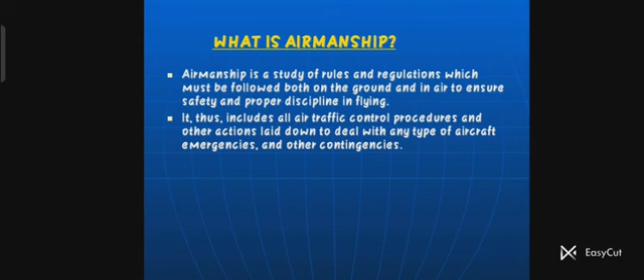Why is airmanship important for aviators? Airmanship helps to inculcate the sense of discipline amongst pilots and other crew members. It helps the pilot to know the standard procedures. It helps the pilot to know the procedure to be followed in emergency situations. Finally, airmanship, when studied in the correct sense, promotes flight safety and prevents aircraft accidents.

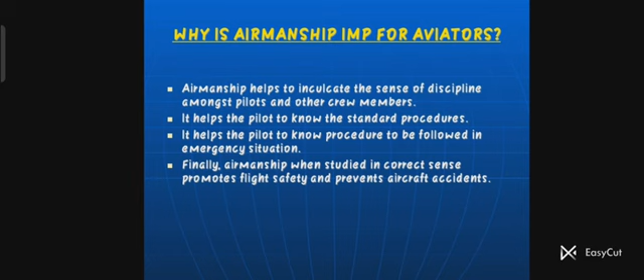So, some of the terms in airmanship are: aerodrome, a defined area on land or water, including any buildings, installations, and equipment intended to be used either wholly or in part for the arrival, departure, and movement of aircraft. So in this picture below, it is a whole aerodrome. We can see that.

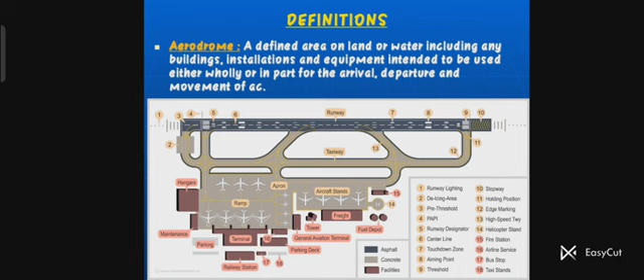Airfield. The airfield refers to an area of land used for takeoff and landing of aircraft and excludes buildings and installations. Airport. The word airport is mainly used for civil flying establishments which handle international air traffic and therefore have a custom house and other travel amenities.

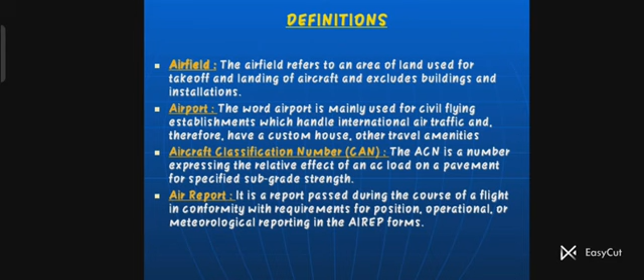Aircraft classification number. The ACN is a number expressing the relative effect of an aircraft load on a pavement for specified subgrade strength. Air report. It is a report passed during the course of flight in conformity with the requirements for position, operation, or meteorological reporting in the AIREP forms.

Aerodrome reference point. It is the designated geographical location of an aerodrome, normally taken as the geometrical center of the runways, or runway in the case of a single runway aerodrome. The ARP is defined in degrees, minutes, and seconds of latitude and longitude.

Aerodrome traffic zone. The airspace extending from an aerodrome to a height of 2000 feet above the level of the aerodrome and within the distance of 1.5 nautical miles of its boundaries, except any part of that airspace which is within the aerodrome traffic zone of another aerodrome which is notified as being the controlling aerodrome, is called the aerodrome traffic zone.

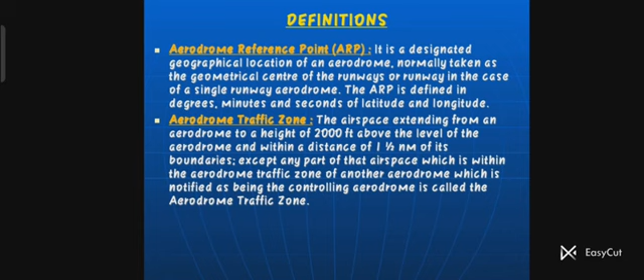Air Defense Identification Zone. Airspace of defined dimensions within which the ready identification, location, and air control of aircraft is required. No flight of aircraft, civil or military, Indian or foreign, originating within the ADIZ defined under Para 1 above and those penetrating into these ADIZ are permitted without air defense clearance, except the local flights conducted within the airspace of 5 nautical miles radius centered at ARP and vertical limits of 1000 feet AGL of an aerodrome. Aircraft when operating to, through or within the ADIZ shall obtain air defense clearance before takeoff through the ATC concerned.

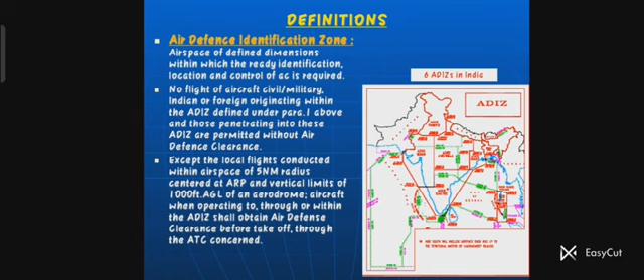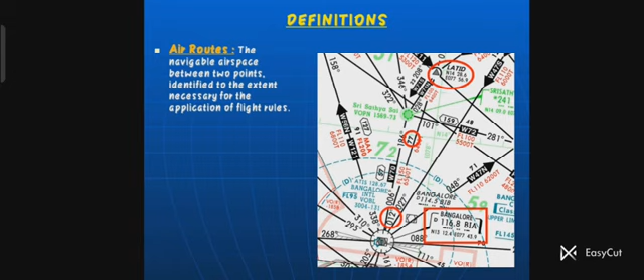Air routes. The navigable airspace between 2 points identified to the extent necessary for the application of flight rules. Here we can see the air routes around Bangalore. Air Traffic Advisory Service. Service provided to ensure separation insofar as possible between aircraft which are operating on an IFR flight plan outside control areas but within advisory routes or advisory areas.

Air Traffic Control Center, an organization established to provide air traffic control within the control area, flight information service within the flight information region, and alerting service for search and rescue within its flight information region. Air Traffic Control Clearance. It gives authorization for an aircraft to proceed under conditions specified by an air traffic control unit.

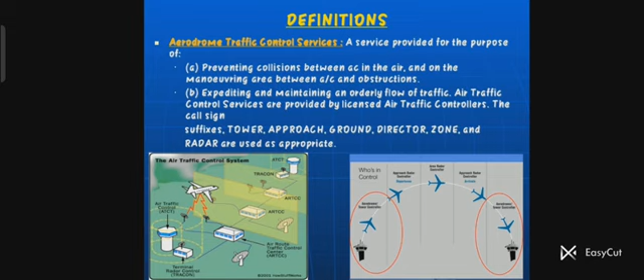Aerodrome Traffic Control Service, a service provided for the purpose of preventing collisions between aircraft in air and on the maneuvering area, between aircraft and obstructions, and expediting and maintaining an orderly flow of traffic. Air traffic control services are provided by licensed air traffic controllers. The call sign suffixes tower, approach, ground, director, zone, and radar are used as appropriate.

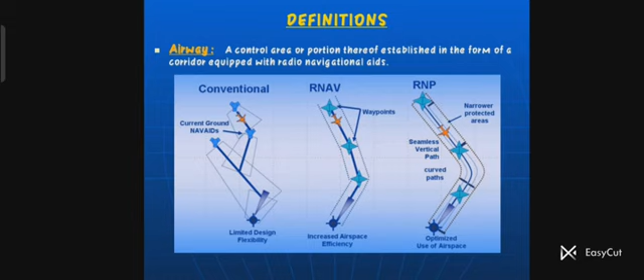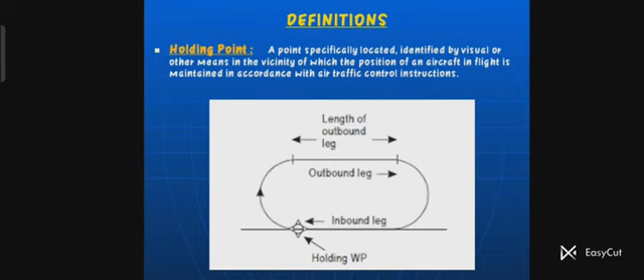Airway, a control area or portion thereof established in the form of a corridor equipped with radio navigation aids. Holding point, a point specifically located, identified by visual or other means, in the vicinity of which the position of an aircraft in flight is maintained in accordance with air traffic control instructions. Heading. Heading is the direction in which the longitudinal axis of the aircraft is pointed, usually expressed in degrees from north.

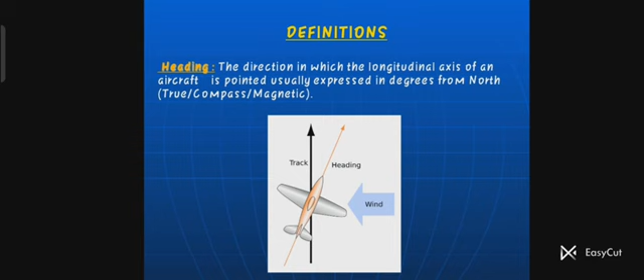Height, the vertical distance of a level, a point, or an object considered as a point, measured from a specific datum. Altitude, the vertical distance of a level, a point, or an object considered as a point, measured from mean sea level. Elevation, the vertical position of a point or a level on or affixed to the surface of the earth measured from mean sea level. Flight level, it is a surface of constant atmospheric pressure which is related to a specific pressure datum of 1013.2 MB and is separated from other such surfaces by specific pressure intervals.

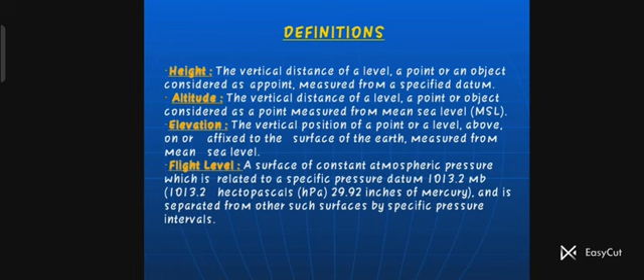Prohibited area: airspace of defined dimensions above the land areas or territorial waters of a state within which the flight of aircraft is prohibited. Danger area: an airspace of defined dimensions within which activities dangerous to the flight or ground maneuvering of aircraft may exist at specified times.

Restricted area: an airspace of defined dimensions above the land areas or territorial waters of the state within which the flight of aircraft is restricted in accordance with specified conditions. Load classification number: the bearing strength of a pavement or runway is defined by a number. This is associated with an indication of the characteristics and type of construction of the pavement.

Alerting service: a service provided to notify appropriate organizations regarding aircraft in need of search and rescue aid and assist such organizations as required. Alternate aerodrome: an aerodrome specified in the flight plan to which a flight may proceed when it becomes inadvisable to land at the aerodrome of intended landing.

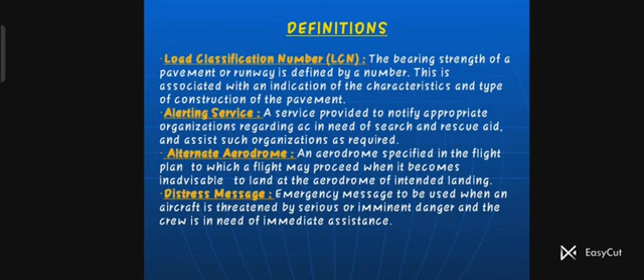Distress message: emergency message to be used when an aircraft is threatened by serious or imminent danger and the crew is in need of immediate assistance. Ceiling: the height above the ground or water of the base of the lowest layer of cloud below 6,000 meters covering more than half the sky.

Estimated time of arrival. For IFR flights, the time at which it is estimated that an aircraft will arrive over a designated point defined by reference to navigation aids from which it is intended that an instrument approach procedure will be commenced, or if no navigation aid is associated with the aerodrome, the time at which the aircraft will arrive overhead. For VFR flights, it is the time at which it is estimated that the aircraft will arrive over the aerodrome.

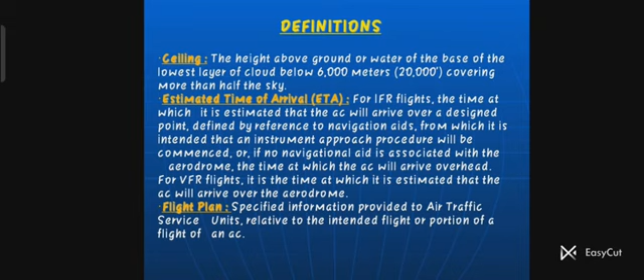Flight plan: specified information provided to air traffic service units relative to the intended flight or portion of a flight of an aircraft. Visibility. So what is visibility? It is a degree of transparency of the atmosphere, or we can say it is the measure of maximum distance to which a person with normal vision can see an object and recognize it.

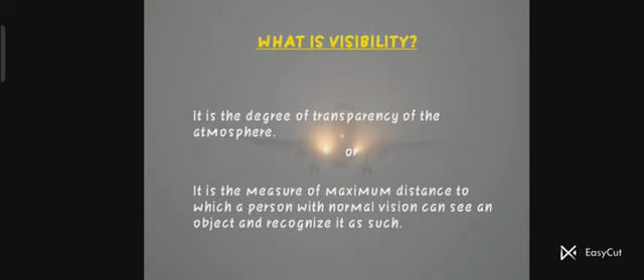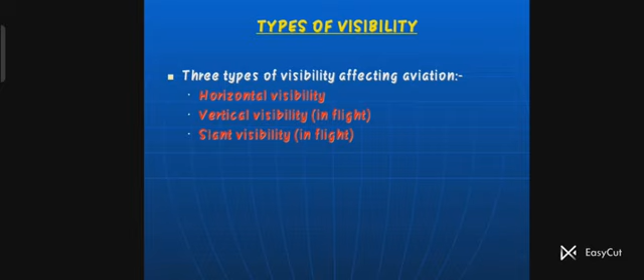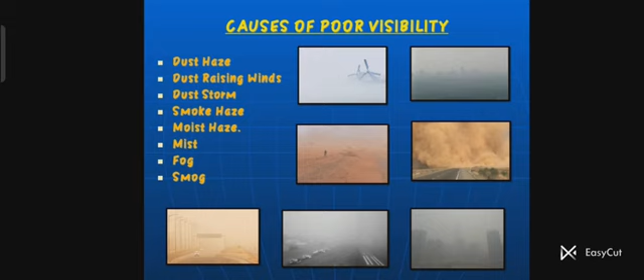Types of visibility. There are three types of visibility affecting aviation: horizontal visibility, vertical visibility, and slant visibility. Causes of poor visibility: dust haze, dust raising winds, dust storm, smoke haze, moist haze, mist, fog, smog. These are all causes of poor visibility. So here are some of the images of the causes of poor visibility.

Shoulders are the areas immediately adjacent to the edges of the runway, taxiways, overruns, and SGAs, prepared for accidental or emergency use in the event of an aircraft running off the paved surface. Cleared zones are those areas of the flight strip adjacent to the shoulders which, for safety of aircraft operations, should be leveled and free of obstructions as far as possible.

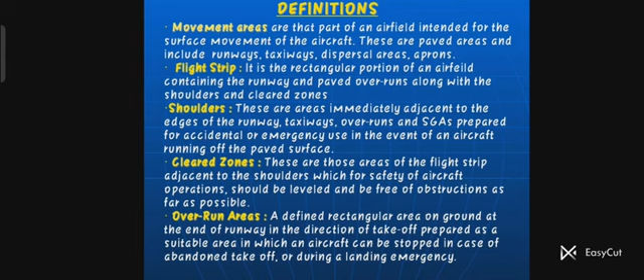Overrun areas: a defined rectangular area on ground at the end of the runway in the direction of takeoff, prepared as a suitable area in which an aircraft can be stopped in case of abandoned takeoff or during a landing emergency. Aerodrome markings consist of signs on the surface of movement areas to convey aeronautical information. Aerodrome ground markings shall consist of runway markings, taxiway markings, and unserviceability markings.

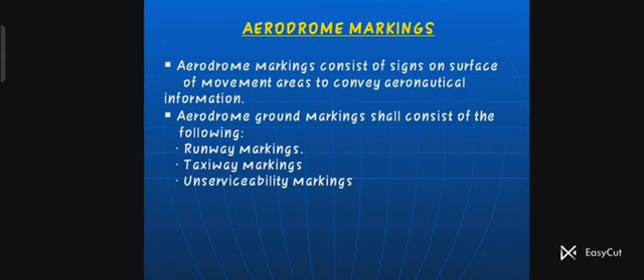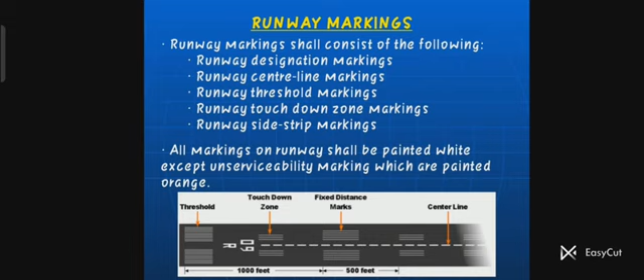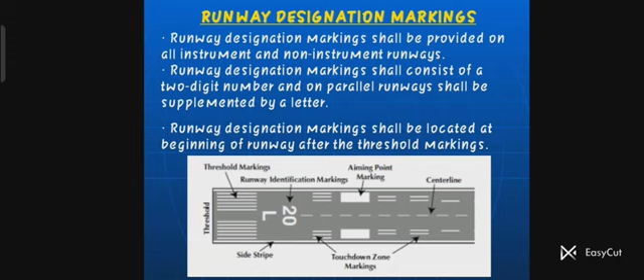Runway threshold markings shall be provided on all paved instrument and non-instrument runways. So the location of the runway threshold markings: the longitudinal stripes of the threshold markings shall commence 6 meters from the runway threshold.

Characteristics. The markings shall consist of a series of longitudinal strips of uniform dimensions symmetrically placed on both the sides of the runway center line and extending laterally to 1.5 meter from the edge of the runway. The spacing between the stripes shall be equal to the width of the stripes except that a double spacing shall be provided between the stripes nearest to the center line.

The dimension of stripes will be 30 meter long and 2.1 meter wide. The number of strips shall be 10. So these are the runway threshold markings.

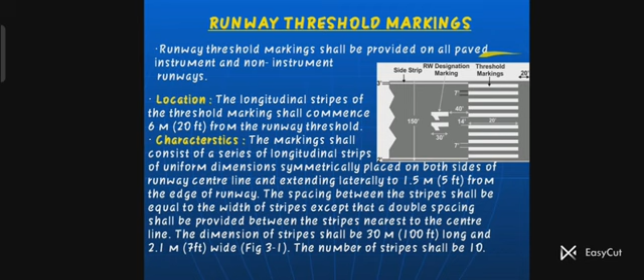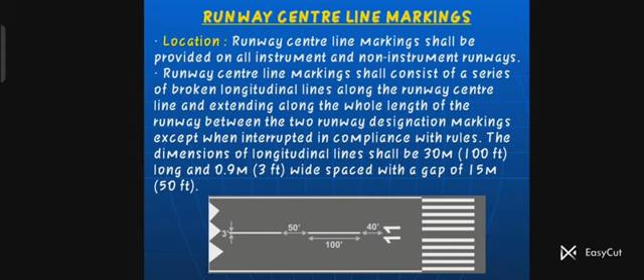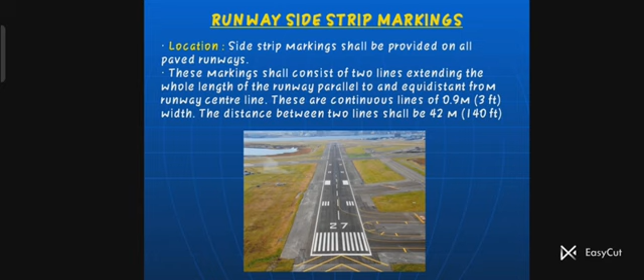Runway side strip markings. Location. Side strip markings shall be provided on all paved runways. These markings shall consist of two lines extending the whole length of the runway parallel to and equidistant from the runway center line. These are all continuous lines of 0.9 m width. The distance between two lines shall be 42 m.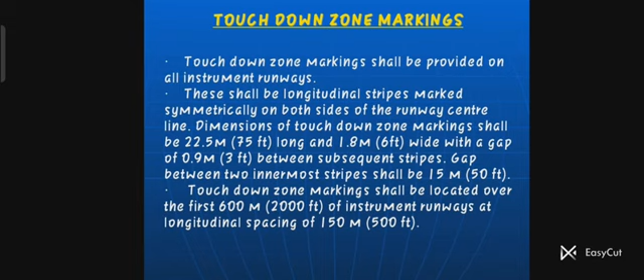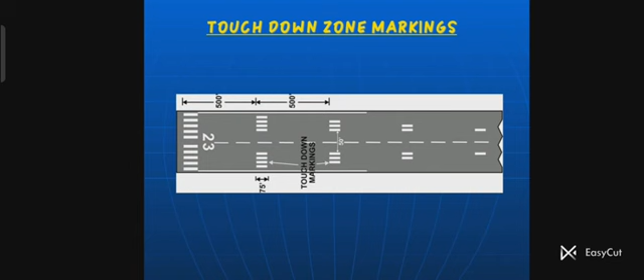Taxiway markings. Taxiway markings shall consist of the following: taxiway centerline markings, runway holding position markings. Taxiway centerline marking. These markings shall be single unbroken lines of 0.15 m wide along the center line of taxiway. These markings shall be painted white or yellow. This line shall terminate where the taxiway meets the runway and shall not be continued so as to cut across the runway.

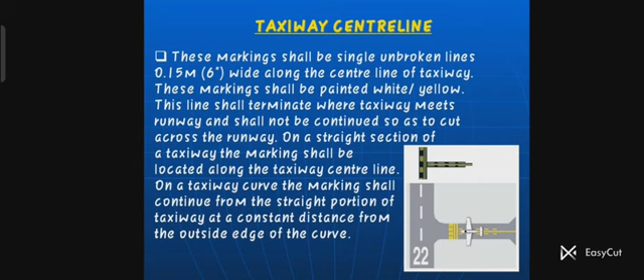On a straight section of a taxiway, the markings shall be located along the taxiway center line. On a taxiway curve, the markings shall continue from the straight portion of taxiway at a constant distance from the outside edge of the curve.

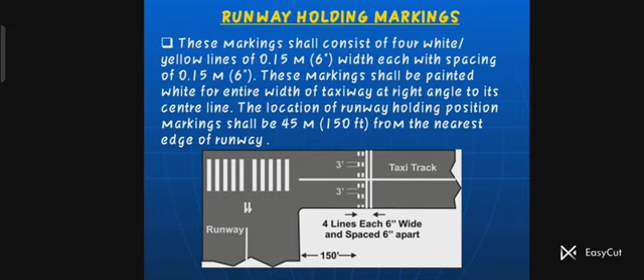Runway holding markings. These markings shall consist of four white or yellow lines of 0.15 m width, each with spacing of 0.15 m. These markings shall be painted white for entire width of taxiway at right angle to its center line. The location of runway holding position markings shall be 45 m from the nearest edge of the runway.

Unserviceability markings. In case of runway and taxi track, unserviceability marking shall be displayed at each end of the unserviceable portion, and unserviceability markings shall be displayed on a runway or a taxi track or portion thereof which is permanently closed to the use of all aircraft. On a closed runway, markings shall be placed at interval of 300 m. On a taxiway, a closed marking shall be placed at each end of the taxiway or portion thereof closed.

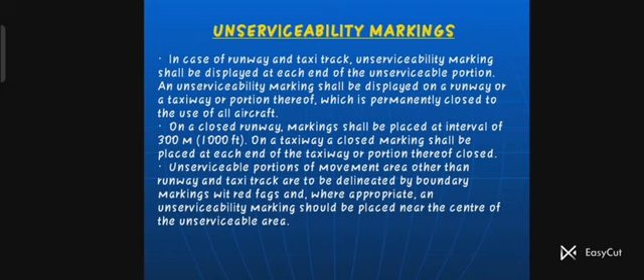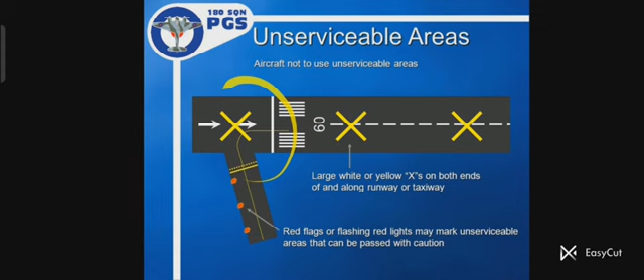Aerodrome lighting. There are several types of approach and airfield lighting in use in the service. All permanent installations are normally on the mains electricity supply, but also have some alternative arrangements for use in the event of power failure. Aerodrome lighting is considered under two headings. These are approach lighting and airfield lighting. Approach lighting. This is to assist the pilots to make an approach for landing in poor visibility or at night.

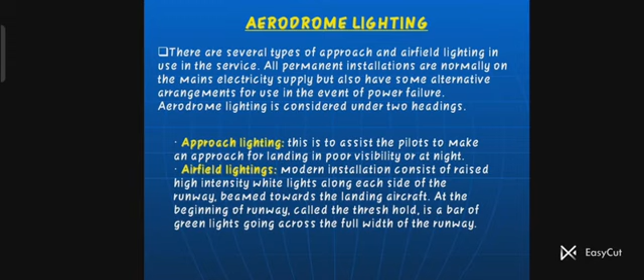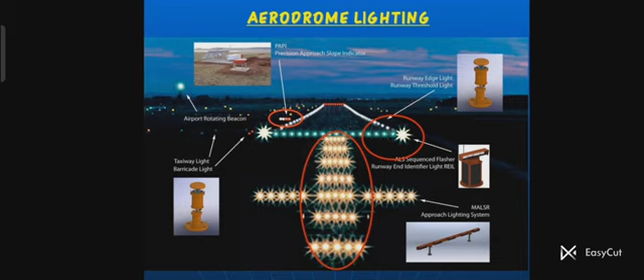In this session, we discussed what is airmanship and why it is important for aviators, and different terms in airmanship, what is visibility and causes of poor visibility, what is airfield layout and different parts of airfield layout. We also discussed runway markings, taxiway markings, and unserviceability markings, aerodrome lighting, that is approach lighting and airfield lighting. Here is the end of the presentation.